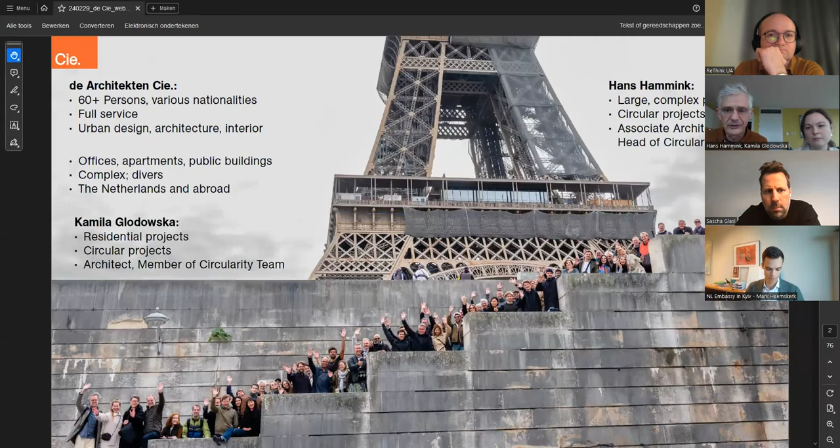Again, thanks for inviting. We will start with introducing ourselves and hopefully inspire you with a few examples of our projects in the Netherlands, but also abroad. And we will also explain to you why we are doing these circular projects. So we are both working at de Architekten Cie., which is an architectural office in Amsterdam, the Netherlands. We are approximately 60 colleagues. We provide full service as architects, and we work in the range from urban design to architecture until interior design. We work on offices, apartments, and public buildings, and we work in the Netherlands and abroad.

My name is Kamila Głodowska. I'm an architect and I'm also a member of the circularity team. That's an internal group run by Hans, within which we try to share and gain knowledge about circularity.

Yeah, my name is Hans Hammink. I'm associate architect at de Architekten Cie. and working generally on large complex projects, and I think now almost full time on circular projects.

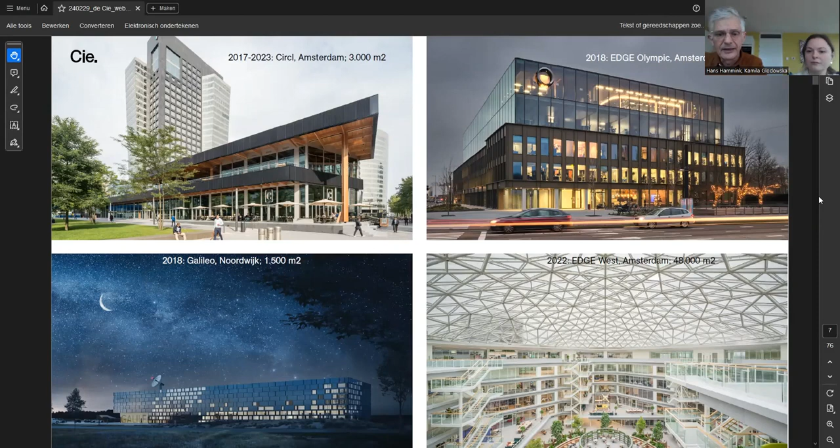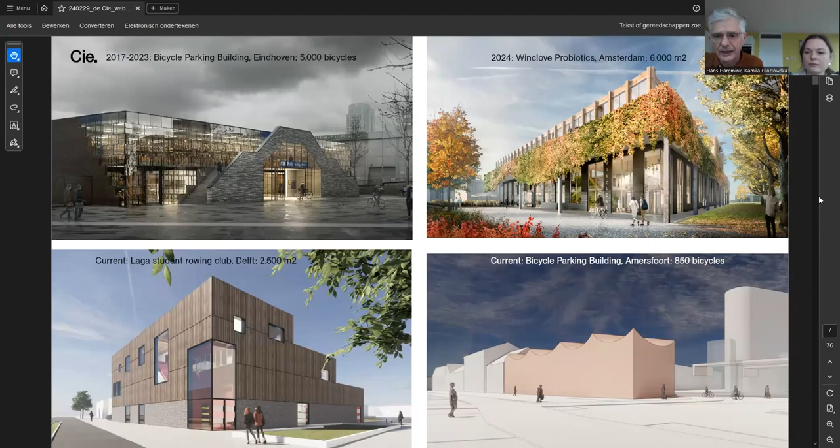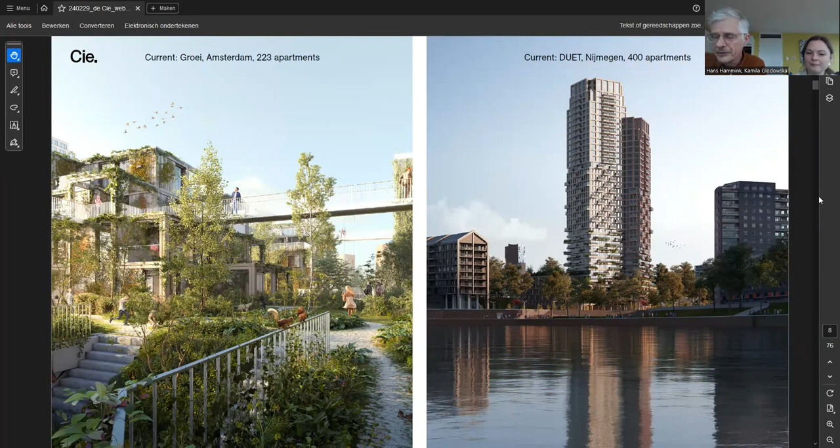Circularity in our office is a bit scaling up, as it were. We are also currently working on two quite large housing projects, one in Amsterdam, 223 apartments, final design stage, and the other one is a project in the east of the Netherlands in Nijmegen with 400 apartments, 120 meters high, and we are in preliminary design stage.

Roman warned me that you know about circularity quite a lot, but this is only to state our definition and what we understand of circularity. So, of course, it started in 1968 when, for the very first time, we were able to see our own Earth as a whole. And after that, we realized this is what we have. This is the only Earth that we have with all its resources. This is what we have to be very careful with.

And this is generally the definition that we use. This is the original definition of the Ellen MacArthur Foundation, who invented the term circular economy. So it is about minimizing energy use, CO2 footprint, using non-toxic materials, extending the lifespan of the scarce materials.

And we also use this definition of the Dutch group CB23, which states that the goal of circularity is to protect the resources. Therefore, protect the materials on this planet, the environment, and the existing value. And in our sector, I mean with that, the existing buildings.

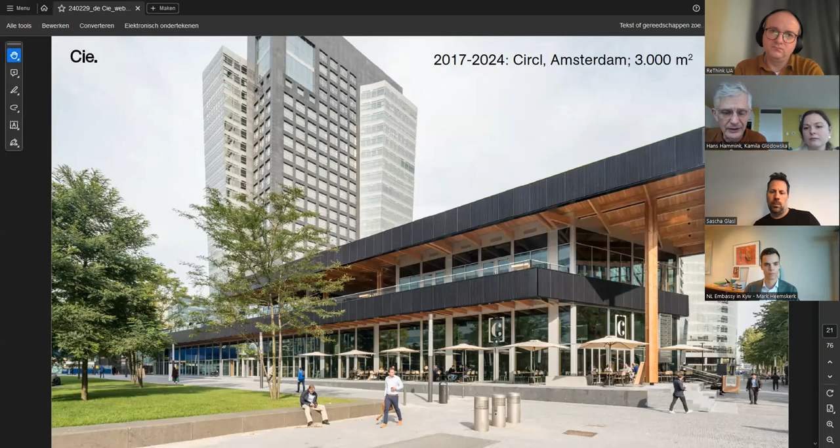And the building for the Dutch bank ABN AMRO consists of a few floors. In the basement, there are meeting spaces. On the ground floor, multifunctional space and a restaurant. And on the first floor, where we are now, is a generous roof terrace. Here you can see the section. The roof terrace is accessible 24 hours per day, 7 days per week.

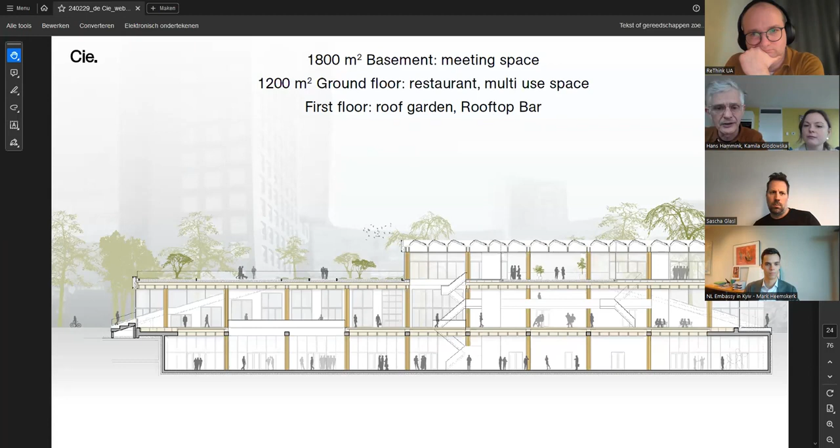The bank asked us to make the most sustainable design ever, and we advised the client to make a circular design, and the client agreed to that. And one of the things that we did is to advise for a timber structure. So here you have the view of the interior of the building, and you see the timber structure, and it is made of locally sourced wood, which, as I explained before, is quite rare for the Netherlands. We don't have that many forests, but we have a few, and this is timber from a local forest, larch timber it is.

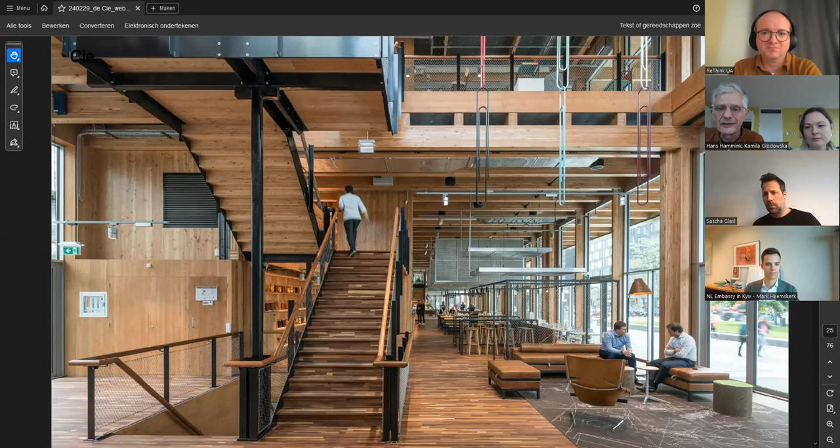And this is a view of the basement of the building. The situation in the Netherlands is such that the water table in the ground is very high, so there is quite a lot of pressure on the walls of a basement. We were forced to make these out of concrete. We didn't favor this material because concrete has a very large CO2 footprint because of the cement in the concrete, but we had to do it. We minimized the amount of concrete. We made as large holes in it as possible to allow for daylight and for timber floors, but we still had to use the concrete.

And from the very beginning of this project, we tried to use used materials, but at that time, 2016, we couldn't find any. For instance, we were looking for used floor finish for the floor, but we couldn't find 1,200 square meters. But eventually we met this startup company, and they offered us some used windows. And at first glance, they didn't look attractive at all.

They were painted white on one side, brown on the other side. They were quite dirty, damaged. The glass wasn't in them anymore. But I decided on the spot to like them and to work with them. And I proposed to the client to apply them in partition walls between the public space and the meeting rooms.

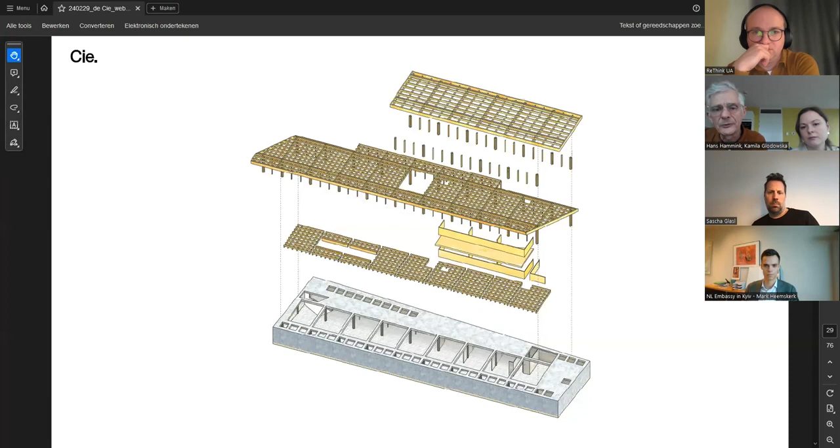We also designed the building such that it could be easily changed, and partition walls could be changed easily, but also the pipes and ducts of the building services. So we came up with this timber structure of wooden beams crisscrossing each other, lying on top of each other. And we did that in such a way that we could weave, as it were, all the pipes and ducts in between the wooden beams. And you see this here. So you see pipes and ducts in between the beams.

And it means that if you position them in this way, you don't have to drill big holes in these wooden beams, so that the beams stay intact, and the chance for reuse of them is therefore much bigger than in the case where you have to drill big holes in them. So these are still generic timber beams. And also all the pipes and ducts are accessible for maintenance and repair. And the architectural implication is that yes, everything is visible, everything is clear, but it is also organized in a certain zone, in between those timber beams.

The sad thing is a bit that, yes, we designed the building for disassembly. We did this 6 years ago, and the disassembly is actually already happening because the bank is moving to a different site. They sold the plot to an international developer, and they saw the opportunity to build a 60-meter high tower exactly on this spot, and that's what they're going to do. So we are in the process now of engineering the disassembly. This webinar is a bit too early, but I think in half a year or a year or so, I could tell you whether the disassembly really works. I was, of course, very sad when I heard this news, but it will also be a good lesson for us, whether our design is really working or not.

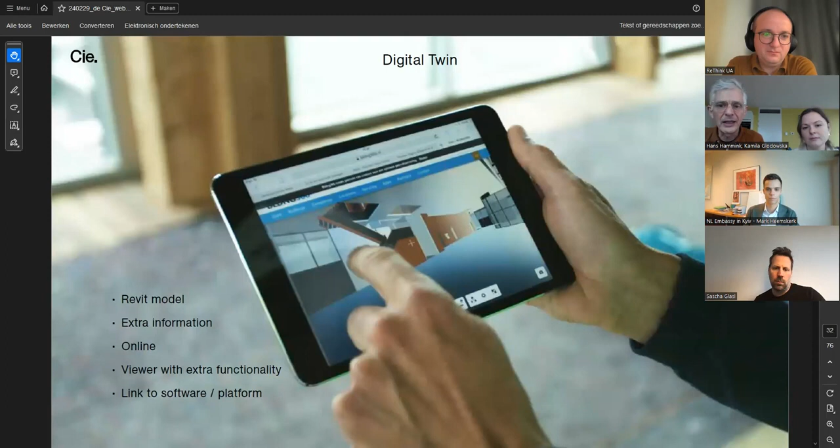And the digital twin that we made of the building, in other words, the Revit model with extra information added to it, like who is the owner of this component, what is the expected lifespan of this component, and what is its technical condition. We added all this information to all the building parts, and we created a digital twin. So a 3D model on which you can click on the components and then find this kind of information. And it was already very helpful in the process of engineering the disassembly.

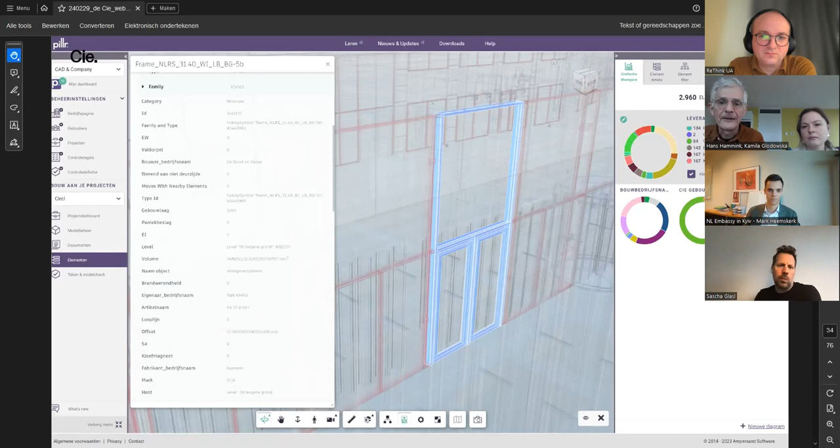One of the clients is a Dutch railway company, and they had just started a program where they wanted to see if there were any possibilities of reusing parts of trains that were at the end of their lifespan. And they also asked me, as architect of the bicycle parking building, if I was interested to have a look at these trains that were going to be harvested.

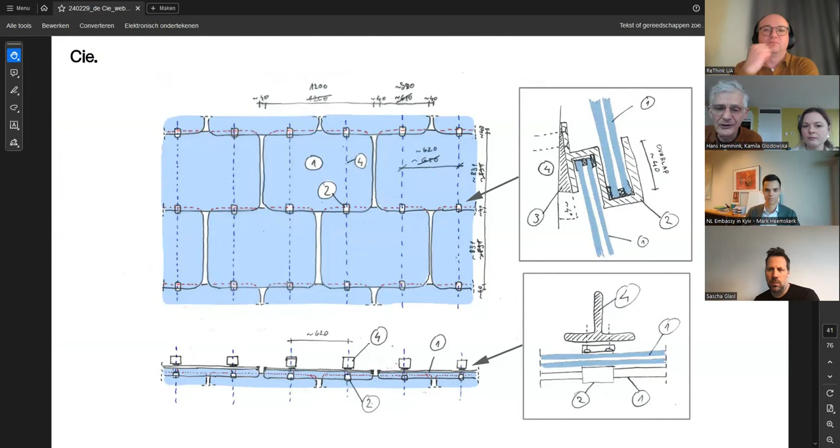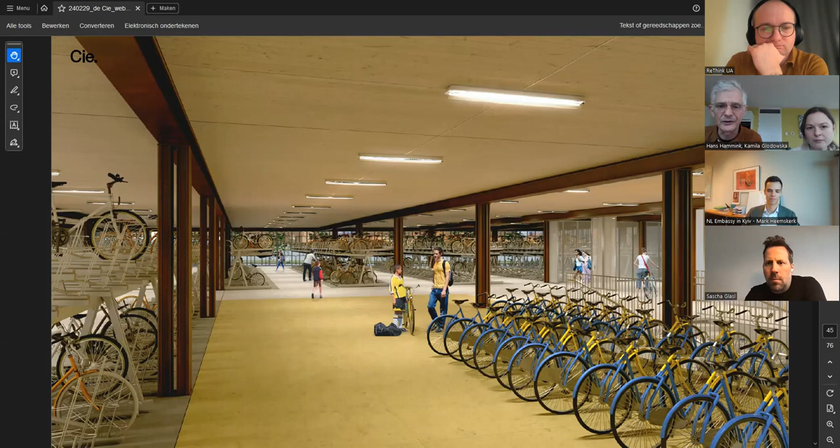And we proposed to use them in the facade of the building. So the bicycle parking building has a facade partly made of these train windows. And we also proposed to use old pavement tiles for some brickwork. And we proposed to the client to use old rails for columns, as you can see here in the interior. And also for the floor, reuse concrete elements. I think for this building, we would reach enormously high percentages of reused components. So it was great fun to work on this project.

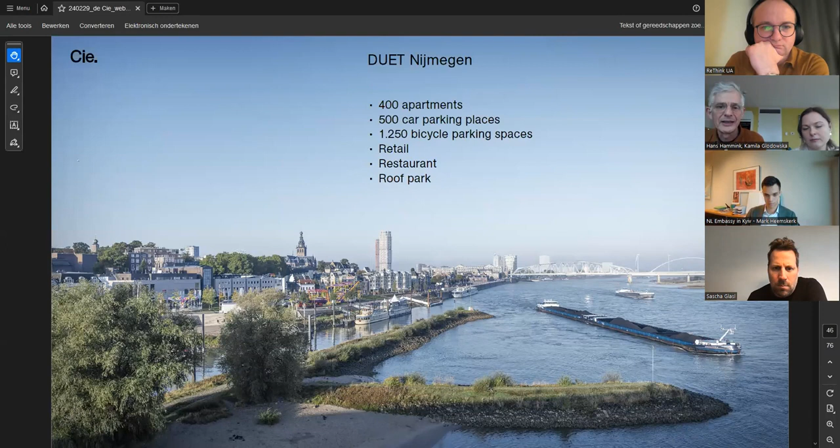And currently we are working on a bit bigger circular project. I can't tell you the outcome yet. We are in the sketch design phase. We do our very, very best to make it as circular as possible, but it's not so easy. It is a big project with 400 apartments, a lot of car parking spaces, serious bicycle parking in it, and other uses. Also integrated in the design is a roof park, and the building is 120 meters high.

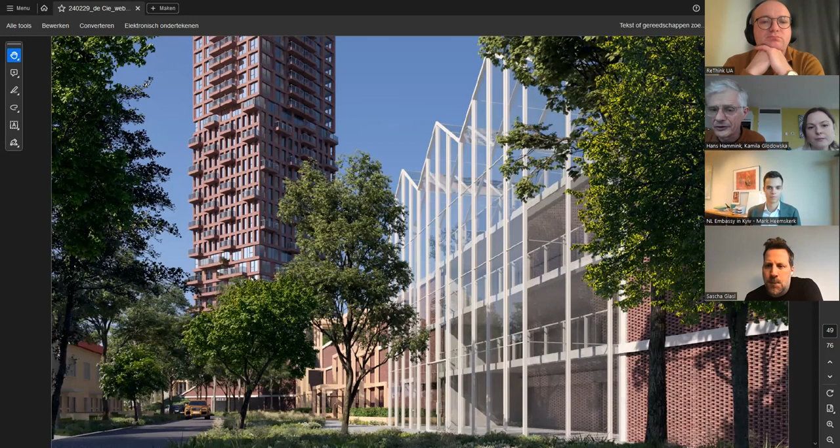So this is a picture of the building in its context. It is next to train tracks, also near a railway station. And it consists of a high-rise part and a low-rise, and on top of the low-rise is integrated a park. These are some renderings from the tender phase, and in the tender phase we already proposed for as many parts of the facade as possible to apply reused materials. So this is a suggestion of using old glass houses for part of the facade.

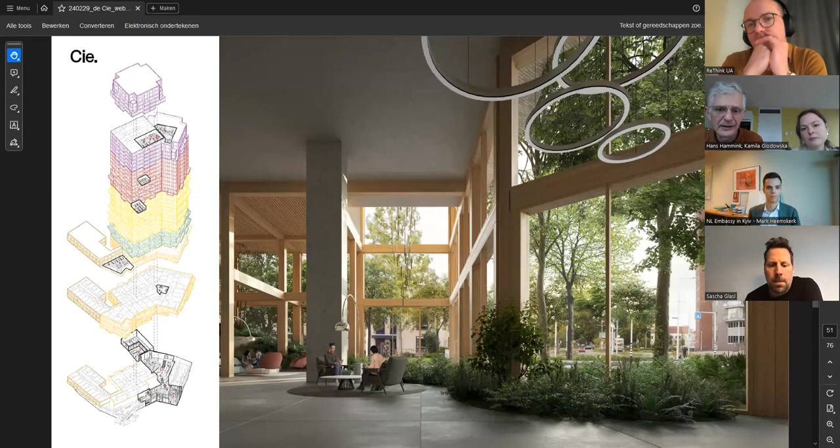And this is an impression of the communal entrance of the high-rise building. We also try to make this high-rise building socially sustainable with communal spaces, not only on the ground floor, but also higher up in the towers where people can meet and do things together. And we are currently working on trying to make the top of the building in CLT structure, a timber structure at 120 meters high. That's not so easy, but we do our very best to make it possible.

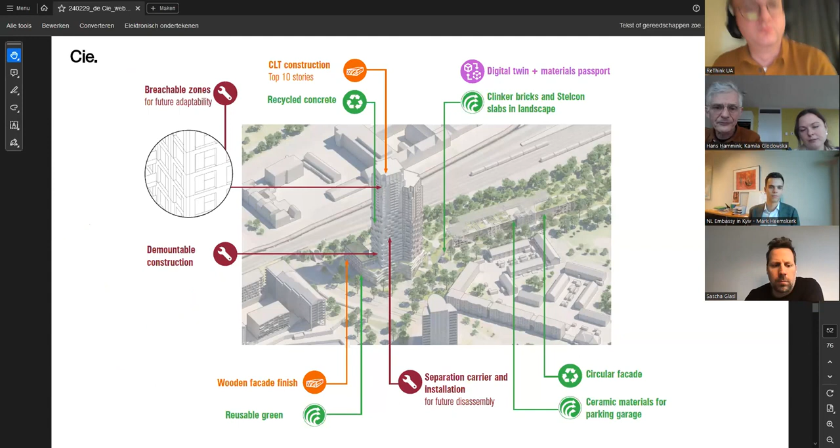And also, we try to introduce to clients visible pipes and ducts. Maybe for us architects that's really a small issue, but for the client it is a big issue, and we are having discussions with them. This is just to show you the day-to-day reality of circularity: this discussion about plastic pipes and ducts, whether in cement or in concrete. But it's great fun. But we are also working on legacy projects, old projects, trying to upgrade them. Thank you, Hans.

So the projects that Hans presented are the new buildings, but we see circularity also as transformation of the existing structures.

The work of the architects spans more than 65 years, so it's no surprise that a lot of projects are actually coming back to us. They are in need of an upgrade after years of service.

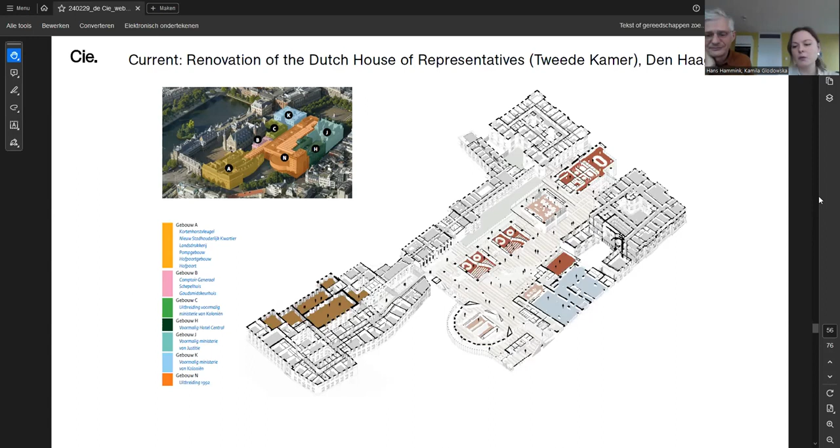So our team, before starting the assignment, gathered a couple of important objectives that form the vision of the renovation. And of course, the primary objective was to improve the accessibility of the building and also the technical parts. The architects also wanted to respect the existing. So whenever possible, the materials will stay.

Circular demolition will be applied. So whenever we remove something, it will find a new life either in a different part of the building or in a different project. And all the new materials are preferably bio-based or produced in a circular way, and ideally also prepared to be reused in the future.

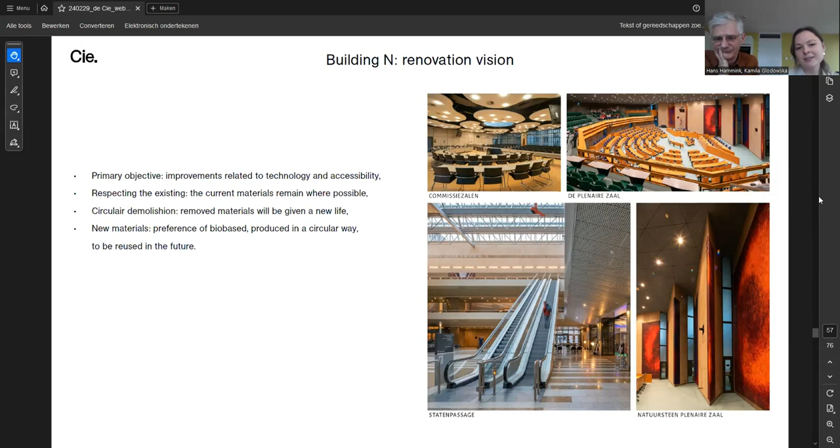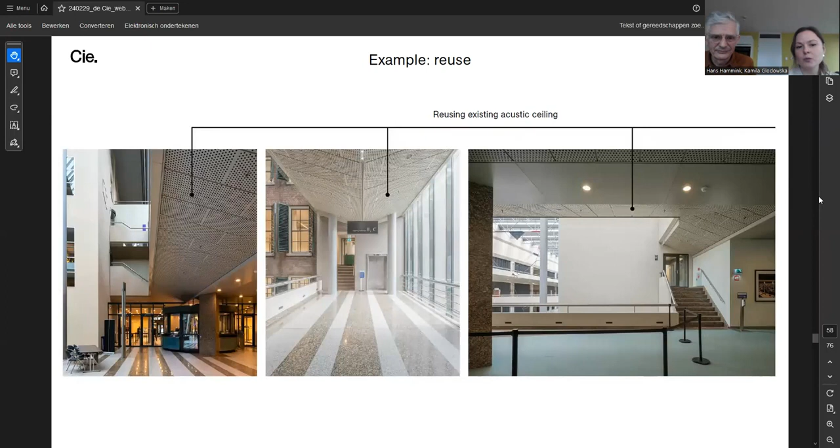And some simple examples which I can show you. So in some parts of this building N, there are acoustic ceilings, and they don't comply with the modern requirements in specific zones. So they will be taken out, but not simply thrown away. No, they will be placed in other zones where the requirements for the acoustics are a bit lower.

And of course, during that process, some stones might get damaged or they need to be cut because of some adjustments in the walls. And then in order to not waste this material, it will be harvested and transformed into a new material. So it will create some kind of a collage of old and new.

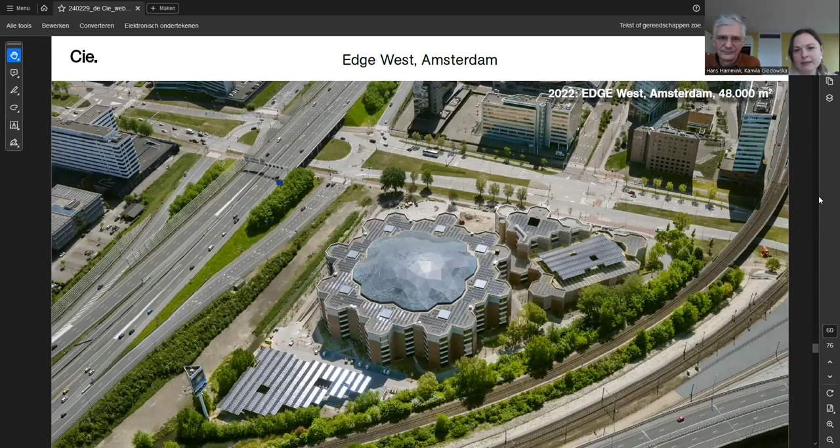Another project I would like to show you is the office of Edge Technologies in the west of Amsterdam. It's also something that we can call a legacy, because it was designed in the 60s and 70s by one of the predecessors of our office. And it's clearly inspired by structuralism. It consists of 7-story high towers in a hexagonal form. And in the middle of those towers, you can see a courtyard, which actually was not really used.

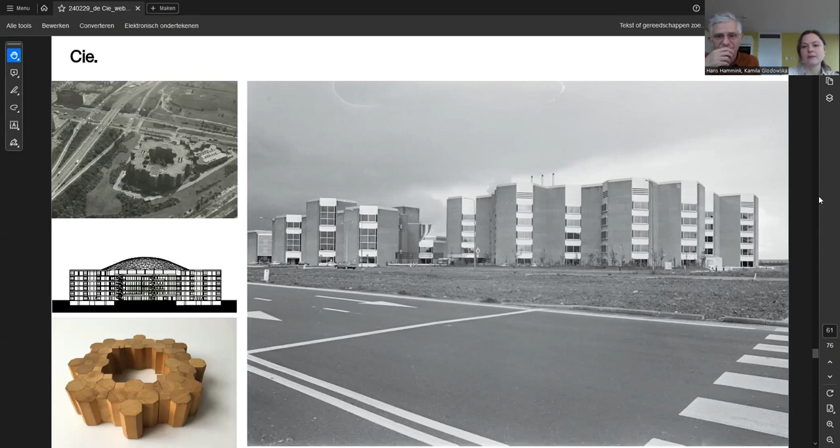And this is the building after the renovation. As you can see, the exterior didn't change much. The facades were kept almost intact when it comes to the rhythm and character of the building. So that's how we approach it, with respect towards the existing and the initial intentions of the designers.

The thing that actually changed is the performance of the building. So the exchanged parts, like windows, got higher quality glass, and the added courtyard also contributes enormously to the climate performance of the building. That's one of the old photos where you can see the courtyard, and you will see a big difference.

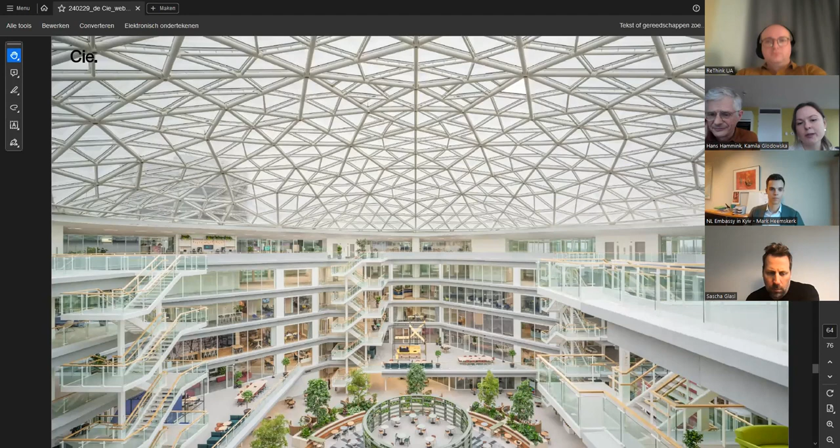The external walls facing the inner courtyard were stripped to open up and bring more daylight into the workplaces, and to turn the building inwards towards the central atrium, which became a heart, a meeting point where people could meet spontaneously and intentionally. Some extra circulation elements were added to stimulate movement and meeting. And the glazed roof evolved naturally from the structural composition of the building.

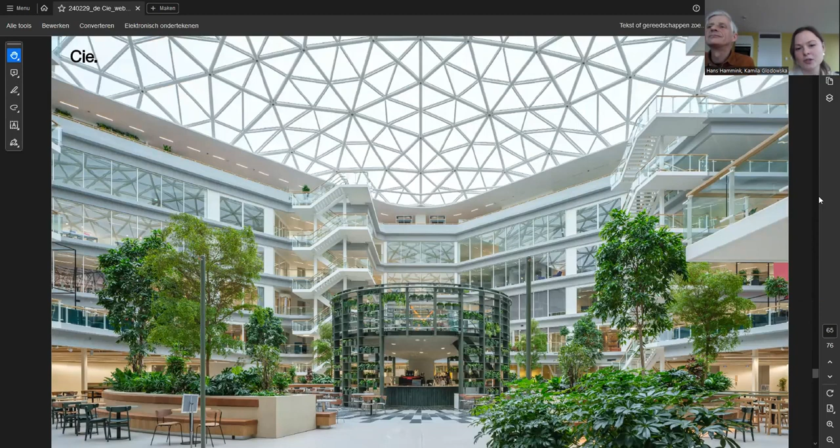And like Hans usually says, it's hard to make a fully circular building, but every project we make is a step forward and brings us to the next level. So we cannot say this is a fully circular building, but there are some attempts done. One of them is, for example, the brick that was developed with StoneCycling, which incorporates parts of the demolished inner walls.

So the volume was topped up with 2 extra layers, and the building was perforated with 2 atriums to connect the floors and provide more daylight as well. The new floors are built with the use of a timber bearing structure. That was actually a smart solution because there were no necessary changes needed for the existing structure. It could simply bear this extra load of lightweight construction.

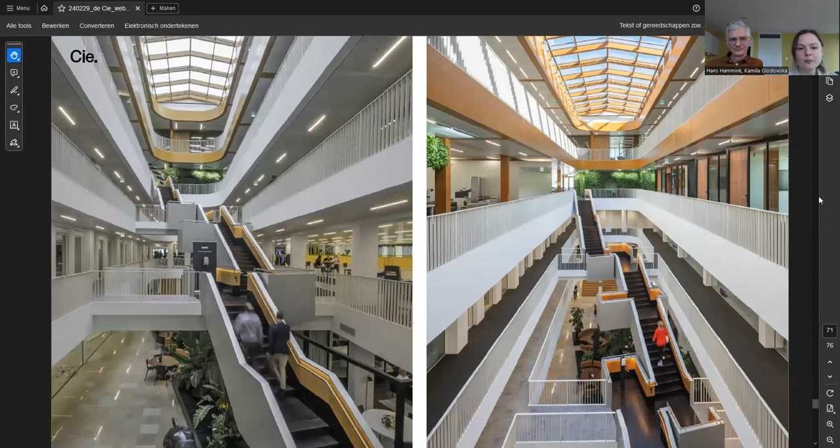And here you can see the atrium that was created. On the left picture, it's from the lower floors, and on the right, from the upper floors, which I like those comparisons as well. You can see the connection between the floors, but also how the space changes just by simply adding more biomaterials like wood. It's much more friendly and inviting.

And another example of thinking differently about the function of materials. So in the existing building, we also opened up the facades to bring more daylight, which required cutting the parapet of the building. And by removing the existing stone, it was harvested and reused as a floor. So that's also what we saw in the bicycle parking, for example: something that has a different function originally can completely change and serve a different purpose, like the railways.

And I give the floor back to Hans.

Yeah, so I think we learned quite a lot about these circular projects. It was learning by doing. We started with these projects and learned along the way quite a lot. And in order to share this knowledge amongst our colleagues, but also for a wider audience, we decided to make a book called Lessons in Circularity. And the book itself is, I think, a circular product also, because of course we used recycled paper, but we also used a specific typeset for the letters that uses as little ink as possible.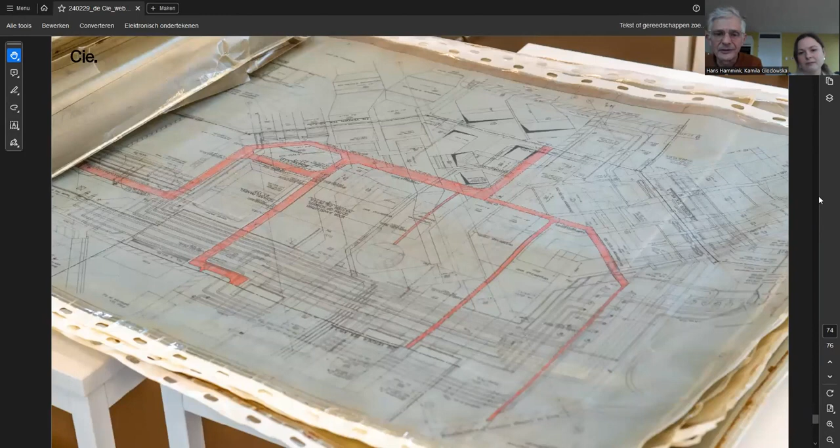And for the cover of the book, we used old drawings of a project of ours. So each individual book is different, because it is a different cut from a drawing. And we updated the book with a handbook now for very specific information. How do you actually design a circular building? How do you engineer it? How do you make technical details with it?

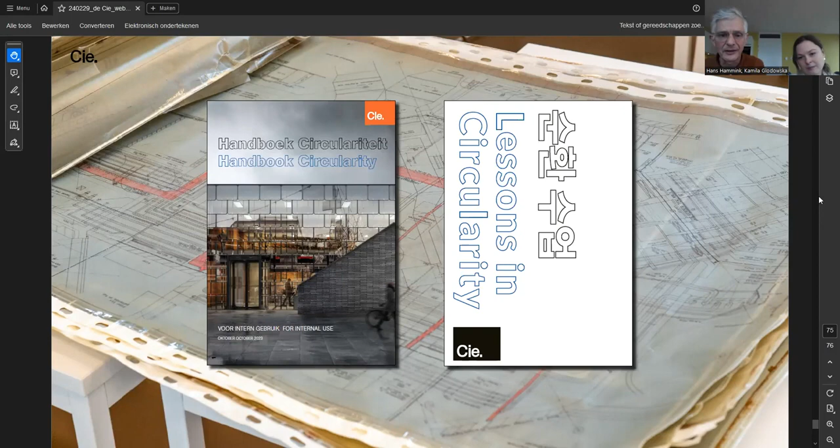And currently being printed is a Korean English edition of the book Lessons in Circularity, being printed at the moment in Korea. So we like to share our knowledge about circularity because we understand that it is very handy and also necessary that everybody knows about it and knows how to act and to design to make a circular building. So thank you very much for your attention, and we are very open for any questions at the moment.

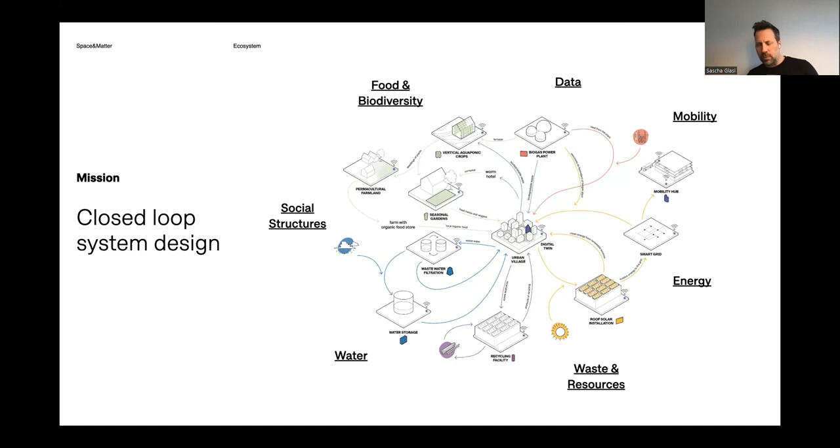That's something very tricky, and that's also the reason that when you don't really have this infrastructure for the materials, it's very difficult to design with them because they are just not available. So you have to design with the unknown, and that's what we often do in our projects. From the very beginning, we embraced the circularity principles, but also the idea of working together with communities.

A couple of years ago, when Kate Raworth published her book, that was describing our mission way better than the circular economy, because it beautifully describes this ecological ceiling, where we talk about climate change and CO2 reduction, which sustainability or circularity is often narrowed down to. But we also see that equally important is this social foundation.

We were part of these exercises and projects in the last 15 years, and the most circular projects we did were often for the people who can really afford it, who have the time, who have the means. If you really want to scale up and make it accessible for everyone, you should not forget the social foundation. So basically, help the broad masses, give them tools to reach the same circularity goals, or not overshoot the ecological ceiling of the planet. I think this donut narrative fits way more into what we did the last 15 years.

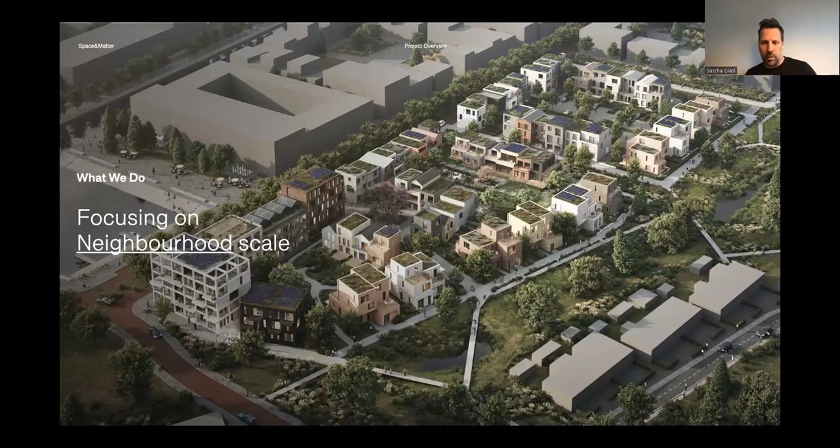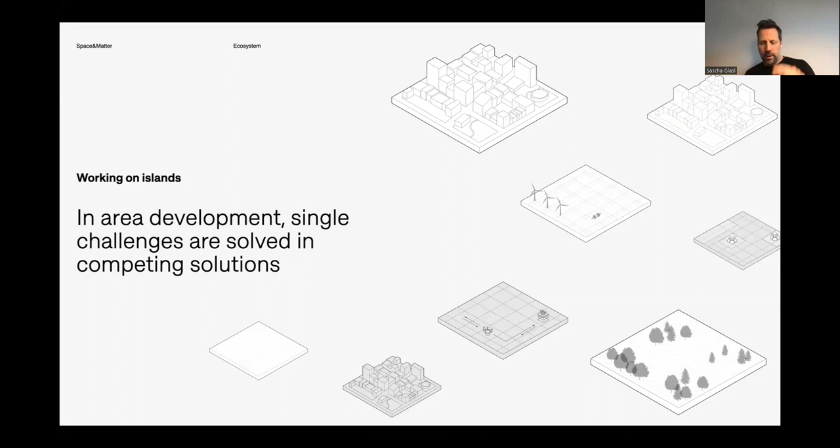And in area development, how it usually goes is that all these different departments have their own ambition, right? There's the nature department who wants to create a little bit more nature. The sustainability department wants that. Then the financial department wants a bit more money. And in a tender, for example, they're always competing, even if they're great ideas. And it's very difficult to get this whole system change through with a holistic approach.

So what we then started is this neighborhood stack, where we strongly believe that when you do integrated area development or a new vision for change, you have to address all these aspects at the same time.

If these three aspects are not right, then I think it's very difficult to scale up circularity, because the people who usually develop are often financially driven. These models are very extractive, right? You come, you develop, you sell, and you go. But we believe strongly in a community that comes, forms an organization, develops itself, and stays. And in that sense, you really see that the circularity and sustainability ambitions are way higher than in a traditional form.

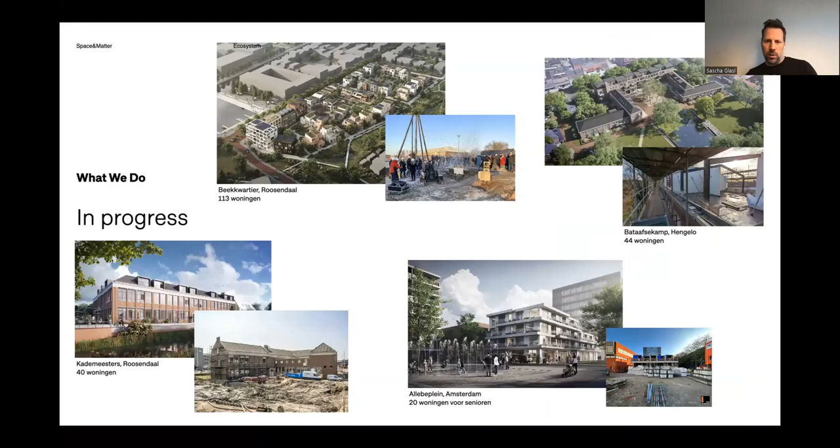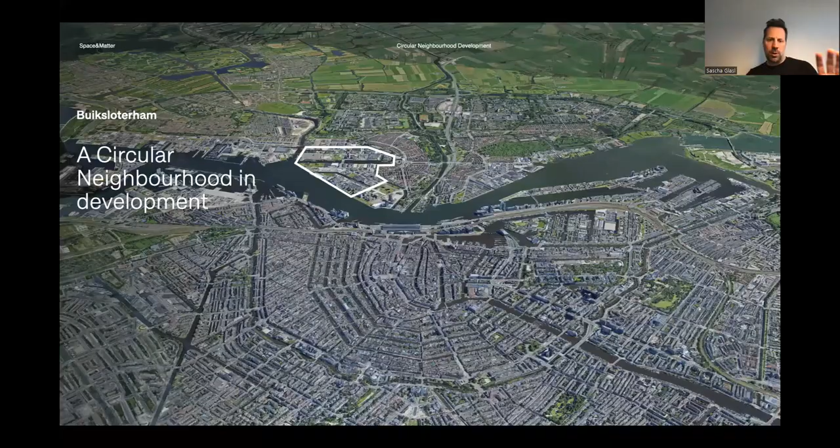So now I would like to show you a couple of them, and a lot are also in the building process now. So this is Amsterdam, and this little white surrounded area is Buiksloterham, a neighborhood in Amsterdam North. And here in the middle of it are the Space and Matter offices. I just quickly want to show you what we did in the last 15 years.

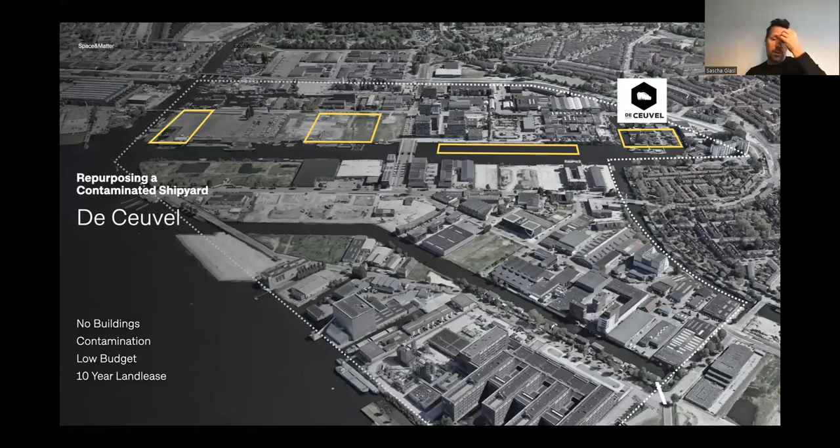So this was a project from 14 years ago. It was an incubator in Amsterdam North where we reused old houseboats and made this beautiful new purifying park, which with phytoremediation takes all the pollution out of the ground. And we recycled a lot of materials here. A lot of innovation went into this.

People might say it's very small, it's not really relevant. At the beginning we were really just experimenting, and it got a lot of attention. All of a sudden, people from all over the world came and wanted to know about it. That was basically the circular approach. But it was really a donut project because it was bottom up, done with the community. They built all the technology themselves, and we learned from that.

And not only us, I think this project was also important as a showcase. And this is one advice I can give you: don't wait for a huge new project. Just showcase your ideas. Also the younger architects, just make stuff, show what you mean. If it gets tangible, people understand.

What happened after we did this project: the municipality and a lot of companies from this neighborhood basically embraced the circular principles and made a manifesto for circularity for the whole neighborhood. So all of a sudden, all the buildings and projects had to be built and developed accordingly.

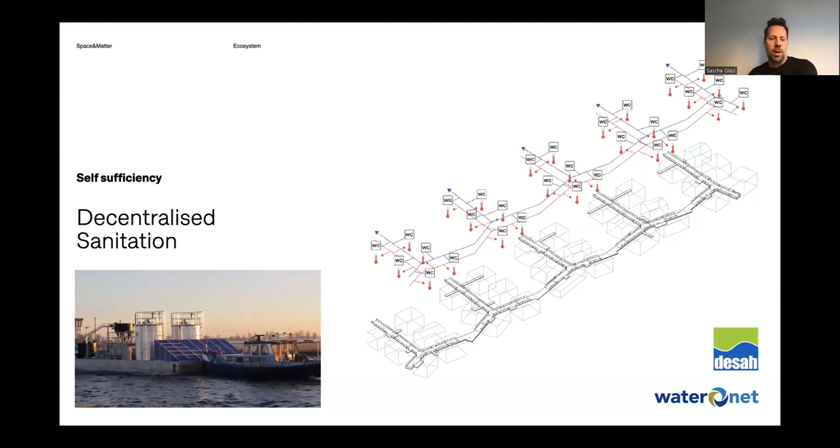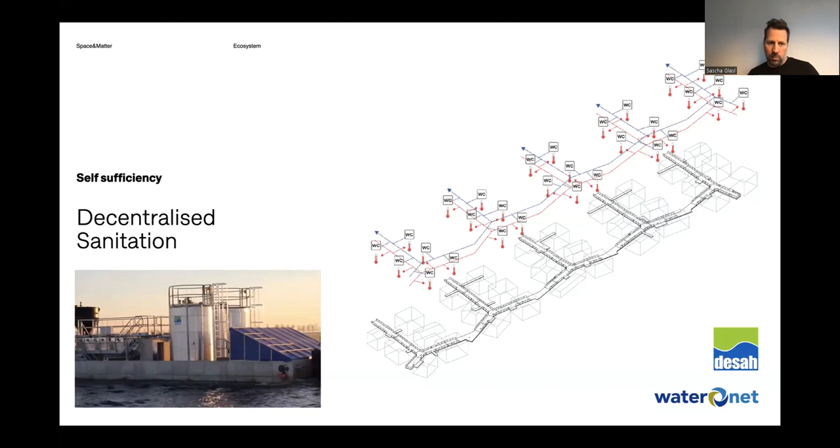What's interesting about this project is it has a decentralized sanitation system. Basically, the black water from the toilets goes with vacuum pumps to this biorefinery, and we then produce biogas from it. Talking about infrastructure, I think this could be very interesting to experiment with, because it's decentralized. You don't need huge infrastructure to operate some sanitation systems. The other thing we did in this project is a local smart grid.

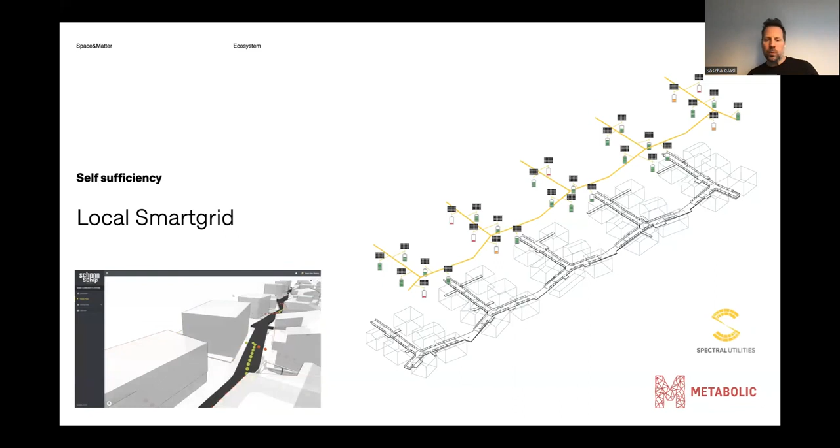So we just connected to the infrastructure and electricity from the net, but basically the system is almost self-sufficient. So we have solar panels on the roof and batteries in the bottom of these floating houses, and they're all connected with a smart grid. You see that here, the green houses produce, and the red houses consume, and they work amongst each other with this infrastructure.

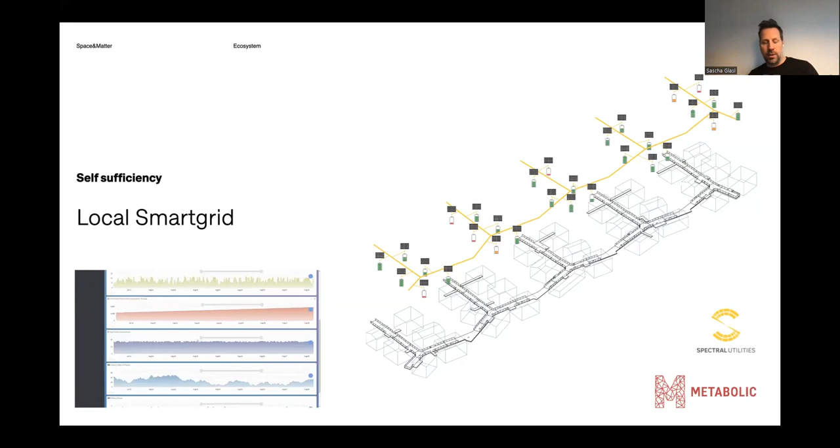So basically, that's also very interesting for the Netherlands, because if all the cities want to go all electric, then this tremendous energy flood which comes into the net, the infrastructure cannot cope with, basically. So again, this decentralized energy system works really great, also on neighborhood level.

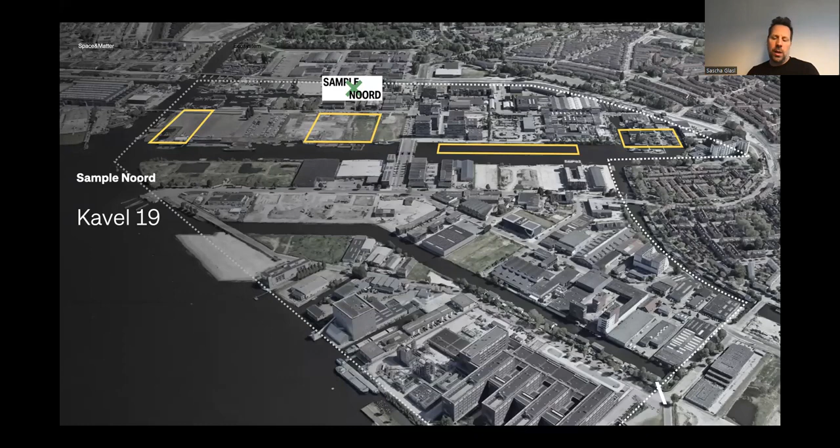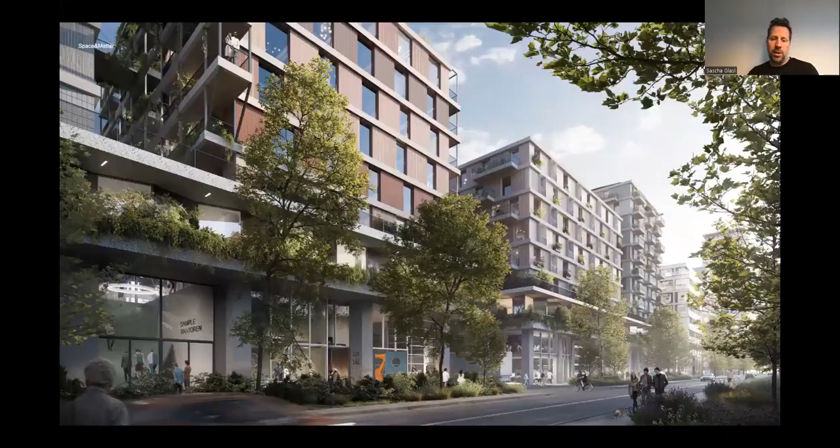Then another project I would like to show you. From this very small project we did 14, 15 years ago, we really scaled up all these ideas and experiments. It's a tender we won last year, which is really big. It's about 360 residential units, but another 12,000 square meter makerspace. And this whole project was also set up with very high circularity ambitions, but also very high social ambitions.

So what we did here is we basically tried to really activate the community in our neighborhood with a lot of companies to help us make this project. So we asked a lot of people and other companies to rent a place in the future, or even buy a place in the future, especially in the plinth. So here on the ground level we have a lot of maker industry from north, from our neighborhood. This is, for example, a company which recycles bikes.

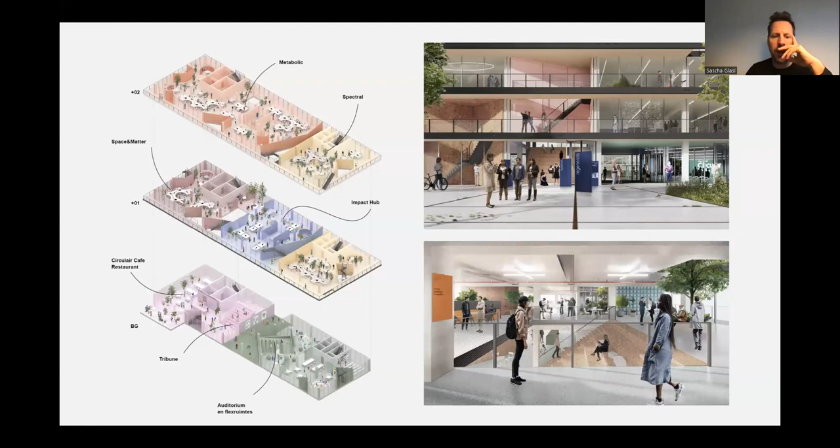So we wanted to build this very big hub for all companies which are very like-minded to us. Even Metabolic and Spectral, other companies we work with often, wanted to be our neighbors here. Because we thought, if we work all together on this place, then we can also have a lot of synergy between the companies.

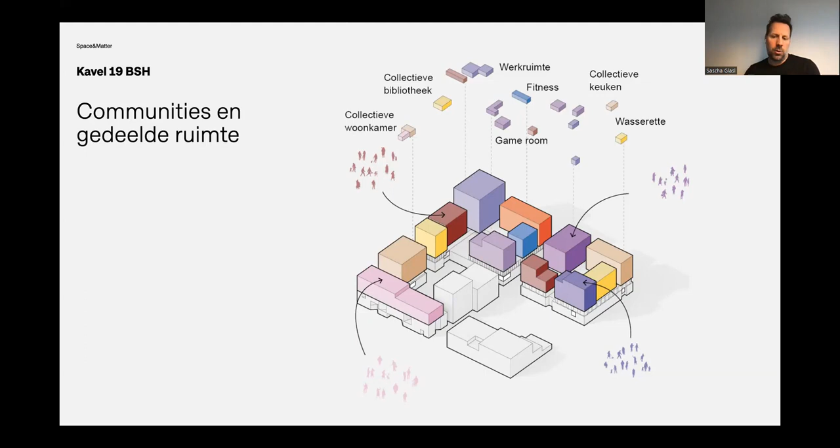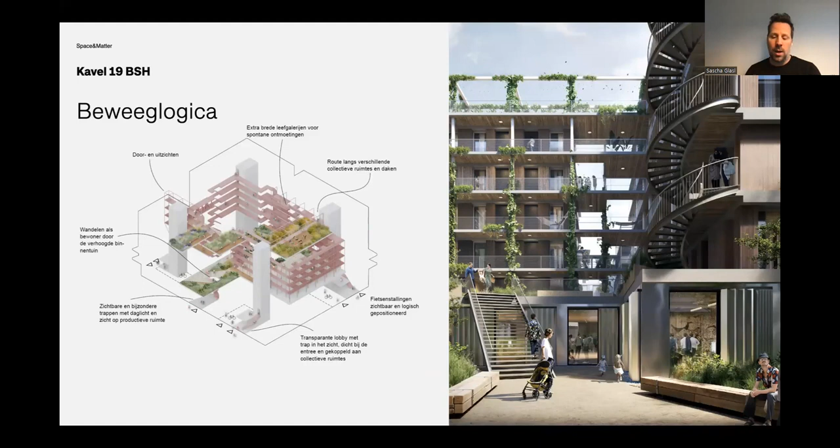And we also added a corridor on the inside of these buildings, next to the elevators, in order for people to move more. So make it way healthier for people to not always take the elevator, but move and take the stairs, but also meet your neighbors. So this is really a place where you can hang out and just meet and communicate with your neighbors.

Then key, I think, often in these projects, is a rich diversity of apartments, so that you don't focus only on one target group, always the four-person family household, for example, but really rich diversity, because demographics change all the time, and you want to attract or resemble a big part of society. And that not only for the size of the apartments, but also for the cost of the apartments.

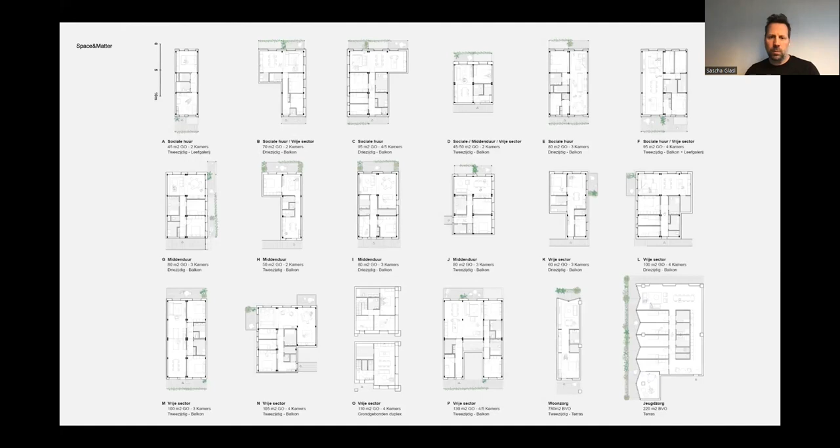And then, when we entered this tender, we knew already that if we win it, and we won it, the construction would probably start in 2.5 to 3 years. But we don't know the materials yet which we will find. So in the tender we said, for the whole facade material, we don't know yet. Usually you have to really define it. But in this tender, we said we don't know yet. We will decide at the moment when we build, based on what we can find.

One idea was also to reuse the facade of the old National Bank here in Amsterdam. But we don't know if it takes longer and then the material isn't there anymore. This is a bit the difficulty in circular approaches, right? You cannot store material for 3 years. It's really unaffordable.

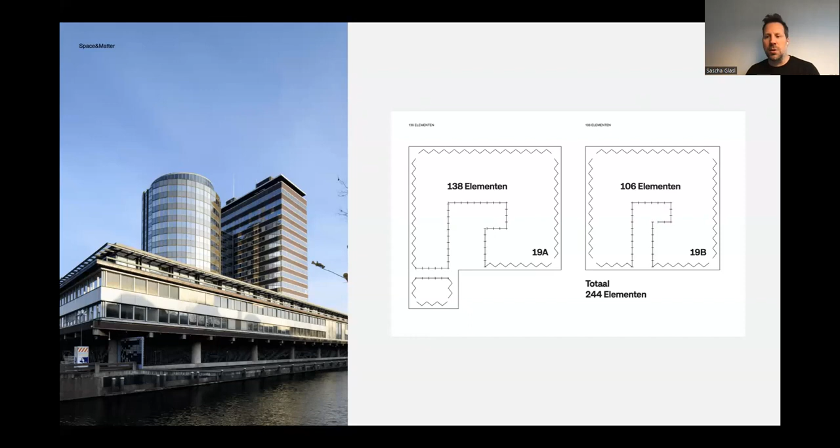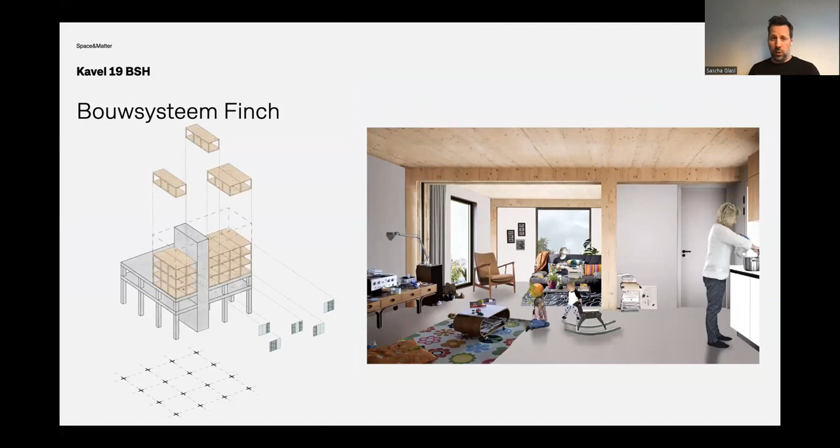On top of that, for the base, the ground floor, we used concrete which was half recycled and half new. But on top, for all the apartments, we wanted to use a building system based on wood from another company, Finch. It's a very modular system. And here, this is interesting also regarding what we discussed before. You see here our MPG is under 0.3, which was really a high score.

So you see in the right diagram, this material flow diagram, the origin. So the renewables, you see this new bar on the top left of this diagram, and secondary materials and primary materials. And you see that the concrete, so the green part, goes really almost 50-50 from secondary and primary.

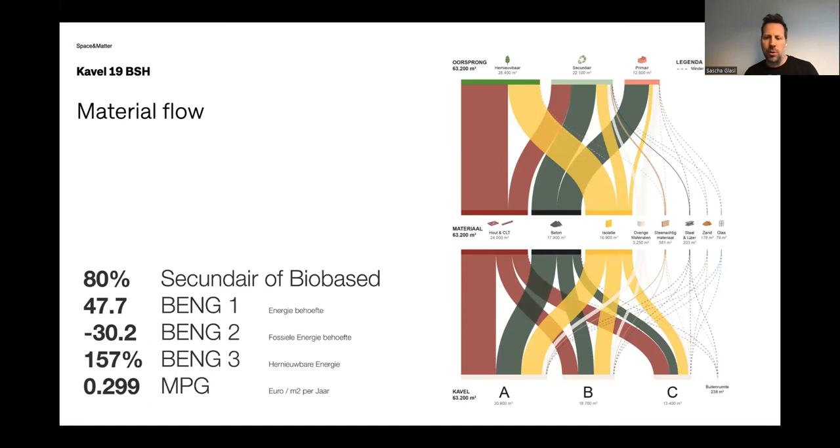We also wanted to have our own food production in this building, so we invited this vertical farm company into the project also, and they will also place a couple of their food production containers in it.

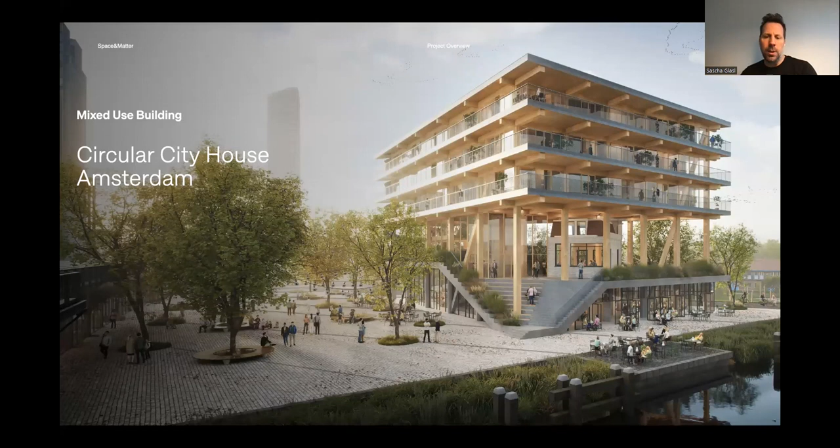Then another building project I wanted to show you. This is also a render of a tender we won, which will start building this year. And we call it the Circular City House. The place is a very unique place in Amsterdam East. There was in the past a very beautiful old coffee house, a cafe, which the neighborhood made a lot of use of. So everyone knew this place, and everyone was attached to this place. Everyone had a story about this place.

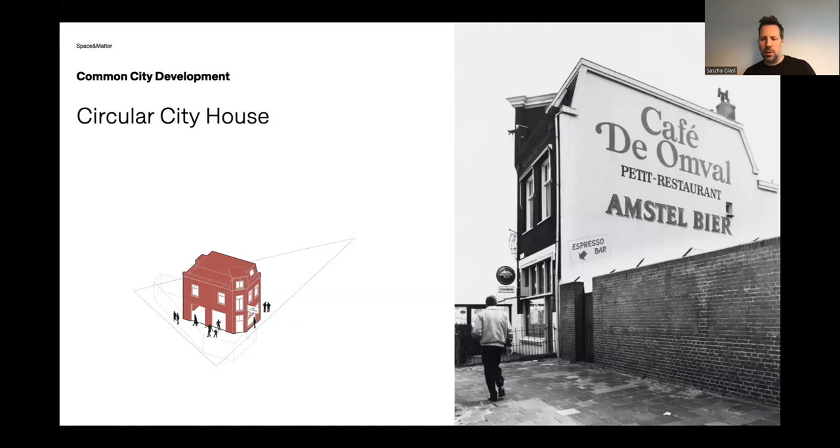And you see already on the left part, this triangle was the plot where the municipality, because it's municipal ground, wanted to have a mixed-use building with a lot of office space, a restaurant, and more program up to the party which would submit. And we submitted here with Space&Matter, our architecture firm, but also with our development company, which is Common City, and we won that together. And our approach was that we don't demolish this cafe, but we reuse it or recycle it basically, or embed it in the new concept.

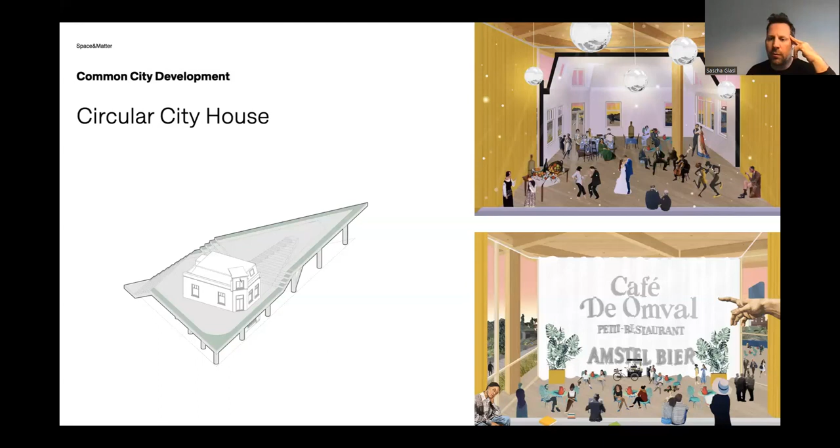So first of all, under this green structure on the left was supposed to be the restaurant, and then on top of it there should be a we space for the neighborhood, for a lot of companies and people who live there, which make use of this cafe in a different way. So we want to cut open this cafe and really have this podium on this level. And on top, we built a timber frame structure and office spaces.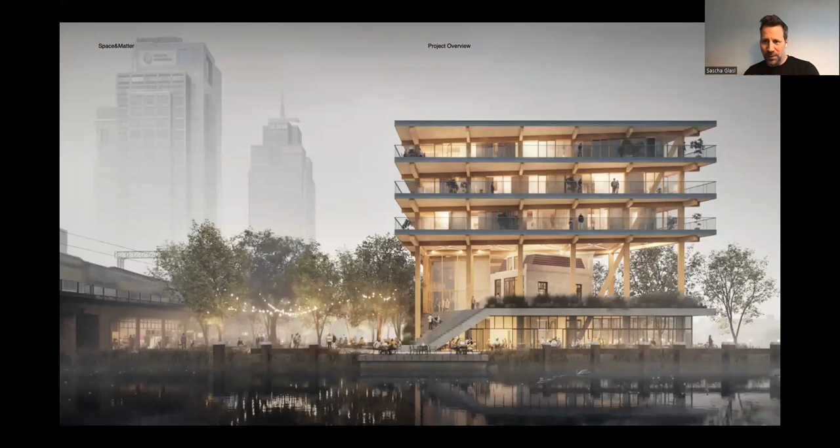And you see here, very beautifully on the right, how the old cafe is integrated. And that was the reason why the neighborhood voted for us, and also the politicians in the city. They really liked this approach, that we dealt so gently with the heritage of this old cafe, which a lot of people were attached to. Here you see it a bit better. And of course, we're in Amsterdam, so it's at the water. It's a very nice location.

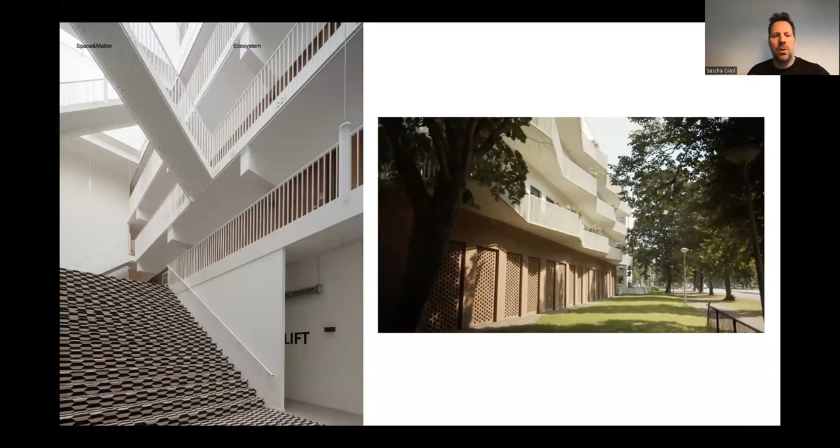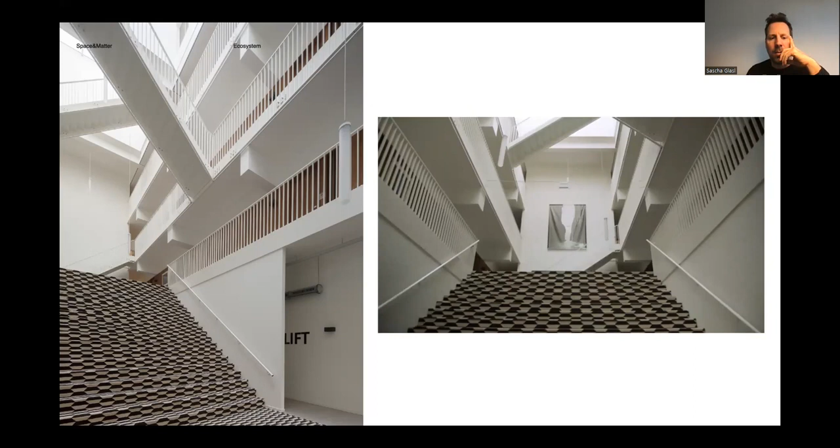It's very interesting that if you have such a building, for example, you see here on the left side, the courtyard basically. In a new building, you would never have this huge courtyard. But here it was a given. And then we added these staircases in order for people to connect way better. That's so interesting: if you have to transform an old building into something new, you often have these possibilities architecturally and spatially that make the building very interesting, which you wouldn't do and couldn't afford if it were a newly built building. Here we also had a very high diversity of different apartments that attracted very different groups of people.

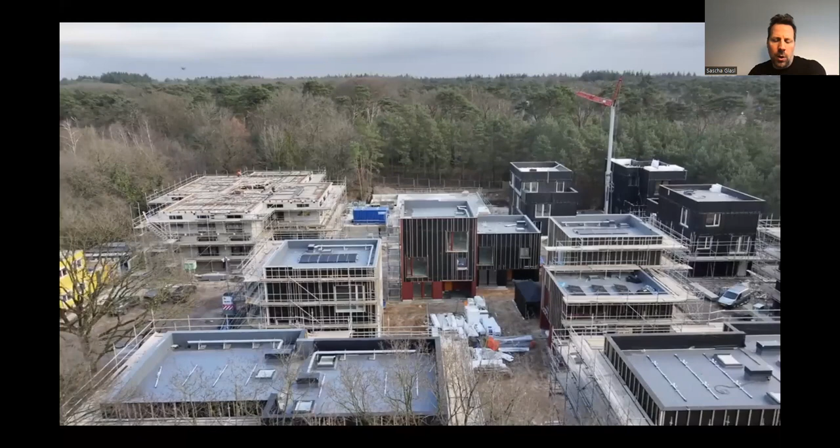So we also experiment a lot with different types of circularity. And that always depends on the project, right? As Hans already said, you often have to see what the possibilities of a project are and then play with them.

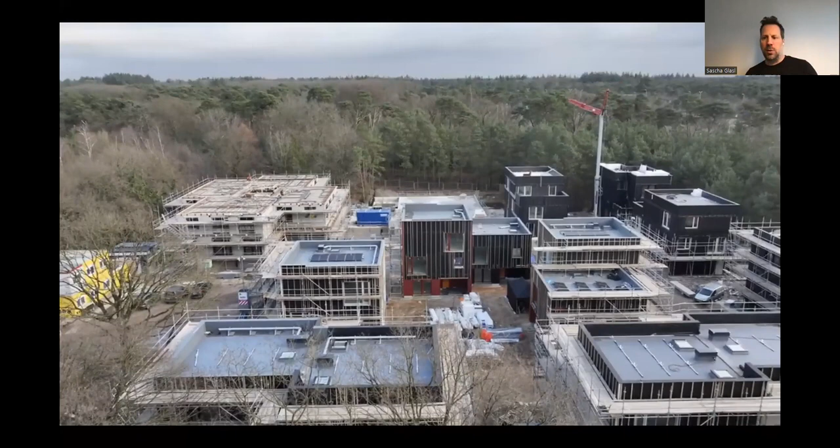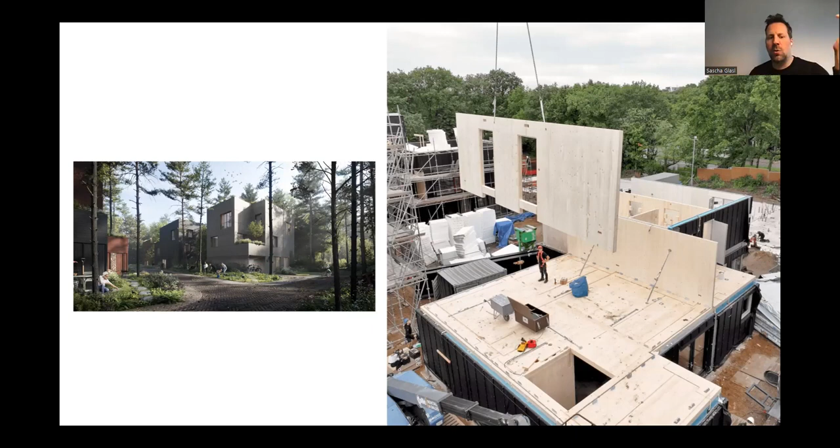You see the different typologies of these buildings we're doing. And then, the advantage of this cross-laminated timber is, of course, how fast the assembly of these buildings is. So the raw building is just set up within 2 weeks, and then you see already everything. This is the social housing part.

Yeah, and as I mentioned already, community is really important to us. We really embrace a lot of these community buildings where often, again like what I said, the discussion about circularity is very technical. But if you combine it with the social part, then you often succeed more in also the circularity part, and this more technical part.

And this is something very obvious to us, that if you work with a group of people who approach us and want to build this huge building, these people are not into profit optimization. They're really into quality, health, and high circularity and sustainability ambitions. So if you help communities build a new place, then you can experiment a lot more with circularity aspects. And what we see, they often also take more risks in terms of how far they want to go with secondary materials and so on.

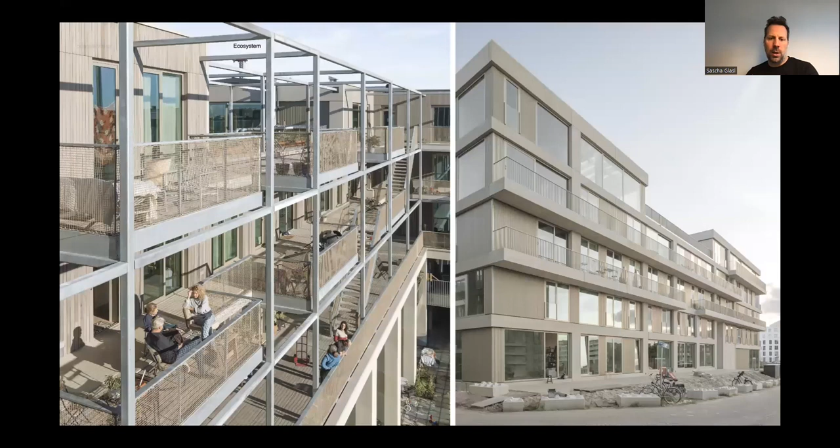This was the project we did for them, with a lot of design processes and design workshops with them. They also wanted a collective space on the roof, like a greenhouse. This is the latest photo from some time ago. And they also have these social spaces here on these galleries to hang out.

I also want to show you, because I talked at the beginning so firmly about the governance and ownership models. Architects are not usually addressing these things, but I think that will come more and more. And as I said, I strongly believe that if the ownership model of a place or of land, and therefore also the governance model, is set right, then we can reach way higher circularity goals.

And of course, in the Netherlands it's really fast forward now. The government does a lot, but the question is, what can you do at places where you don't have that experience or the infrastructure yet, right? I really think that people can often make their own environment way better. They need, of course, professionals, but then the values are set right.

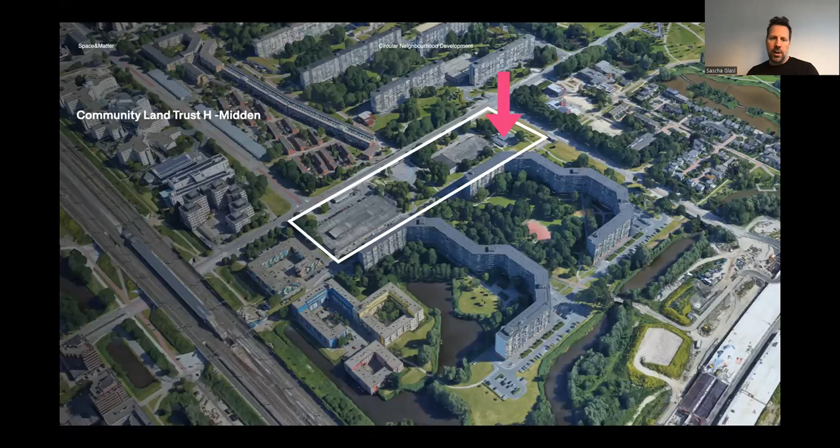So I would like to introduce you also to another project, or more a form of ownership, which is the community land trust. It's also called CLT, not to mix up with cross-laminated timber. The community land trust model comes from the US. We are trying to implement it now at several places in the Netherlands. It basically says, I can show it here, that you have a collective governance model where not only the government, for example, decides what will happen to a place.

It's really this tripartite of, on the one hand, the people who eventually will use this area and live there, the residents or the tenants. Then the people from the neighborhood which surrounds this place, and also the public interest, so the government, for example. These three parties have the same say about a place which will be developed. And the first thing that happens is you organize a community land trust of an area, you organize these three parties, and then you give them land. So the land will be owned by this organization.

What they do then is together make a manifest and write down the values of their place. And as we see now, in the Netherlands but all over Europe, there's a shortage of affordable housing, for example. There is a lack of circularity. So these ambitions can really be imprinted in this manifest, and then it will also be developed as such. So you can have an energy cooperative, for example, social housing, local shops, and everything the city needs there. But the governance model helps to also protect these goals, not for the first or second generation, but for the next 7, 8 generations which will come.

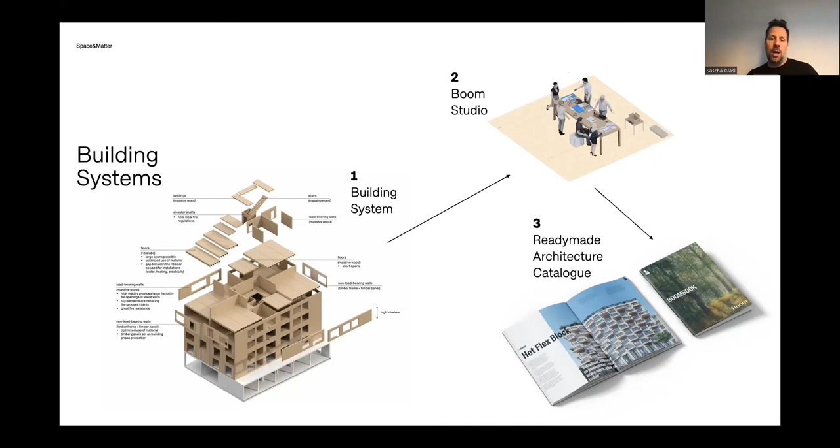And we thought, what if we offer this catalog where clients can just pick a building designed by great architects, which use this building system, where we know exactly what you should and shouldn't do. Then you have this big amount of buildings and this big library, which you can basically implement and improve. And you might say, that doesn't always fit, but we make them such that they fit in different urban configurations, like in a grid, for example an urban block, or more organic shapes.

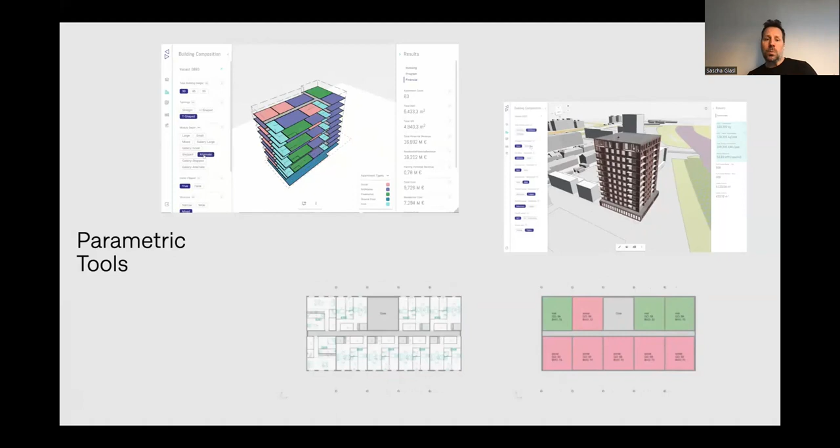And on top of that, we also develop these ready-mades with parametric design principles. So if you would like to change a building, it's easy to change it slightly, because the basic structure, the basic idea, is still very coherent in this parametric model. So you have a lot of flexibility within that, but it should basically speed up the production of bio-based buildings, where it's now very difficult to get it through a traditional process.

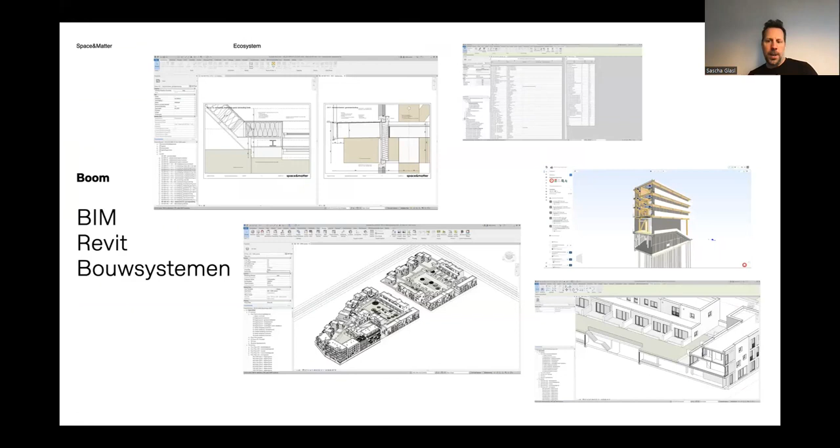Yeah, so thank you very much. I think I'm in time. Yes, we are in time. That's right. Thank you, Sascha. Many thanks for your contribution. We have just one minute left. I believe we will not be able to answer all the questions dropping into the Q&A, but I have to at least ask you one of them.

Okay, there is a question about new biomaterials. Did you manage to create any new biomaterials for construction, and have you patented it? No, we didn't create new materials. But we experimented with hempcrete, for example, which is a beautiful material. Yes, the performance of it is really fantastic. And then of course it always depends, you also need a wooden timber construction as a base, for example. But we don't create our own materials; we use the systems and the producers of bio-based materials.

We use their system uploaded basically in our software, and are very aware of the do's and don'ts of their building system in order to help architects also to design the right buildings, right? We are not so much developing our own materials, because the innovation there is so great already. The difficulty is more how to implement it on a bigger scale. So it's not so much, in our opinion, about creating new materials all the time. Exactly.

All of it, a lot. What we often do depends; internally we have a lot of packages, but we now do a lot in Revit, just purely Revit, and we also outsource renders. So the renders are not always done by the companies anymore. It's a very given thing. A lot of architecture firms, like us, do the construction, the building and the design everything internally, and then the image making is often outsourced. Wow.

And the last one, probably, I have to respect the time of all the participants and also yours, Sascha. What is the difference between circular architecture and sustainable architecture? A very interesting, philosophical one. I have my own opinion, but please, you are the speaker today.

Yeah, I think it's what Hans already mentioned, right? Sustainability is a broader sense. There's always this layer of new ways of describing what sustainability is. And circularity brings a lot more the aspects of reusing, of closed cycles into the discussion, and, though not everyone sees it, originally the social aspect also plays an important role in circularity, which is not often discussed, right? That's why I really bring in the donut, because it beautifully brings in a really wide range of aspects.